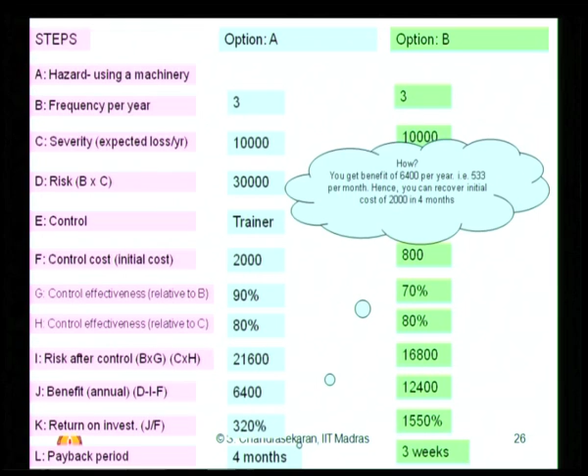So, ladies and gentlemen, we saw two examples. Ultimately, both examples were focusing on how to actually finance risk. The goal is, even if you invest in risk reduction, what would be your commitment towards finance, what would be the return, what would be the benefit annually you get from that risk reduction process, and what would be the payback period of your investment.

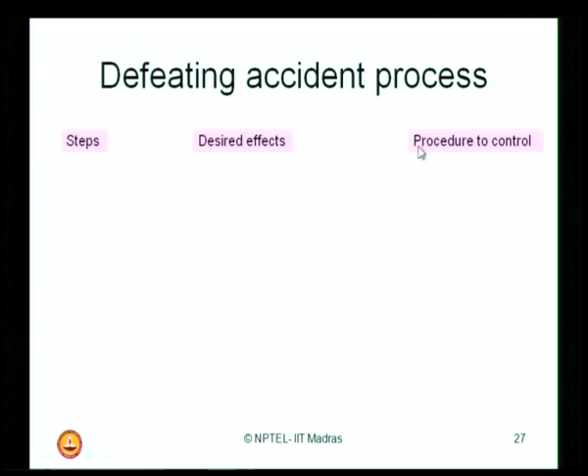Now, we are interested in looking at a very simple phenomena called how will you defeat an accident process. What are the steps involved in defeating an accident process, what are the desired effects, and what would be the procedure to control them. The steps involved are the following.

Initiation, propagation, termination. The event that starts the accident is what we call an initiating event. Events that expand the accident are propagation, and events that stop the accident are called termination. The desired effect on events that start the accident should be diminishing, and the procedure to control them may be grounding, inerting, maintenance procedure, process design, training to reduce human error.

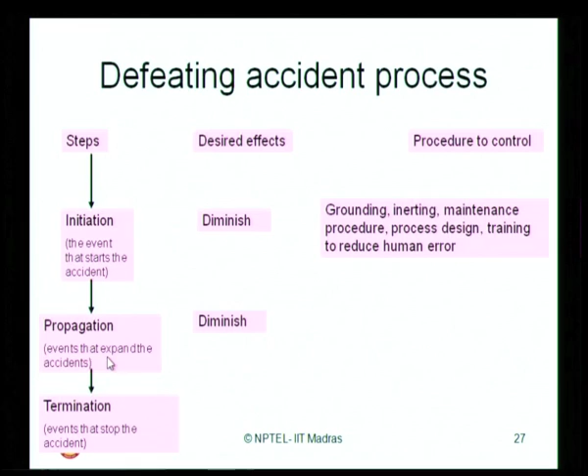When you look at propagation, you do not want those events to expand to result in accidents. Therefore, the desired effect I want on propagating events should be diminishing. The procedures to control them are emergency material transfer, less inventory of chemicals stored in the working place, use of non-flammable construction materials, installation of check and emergency shutdown valves, etc.

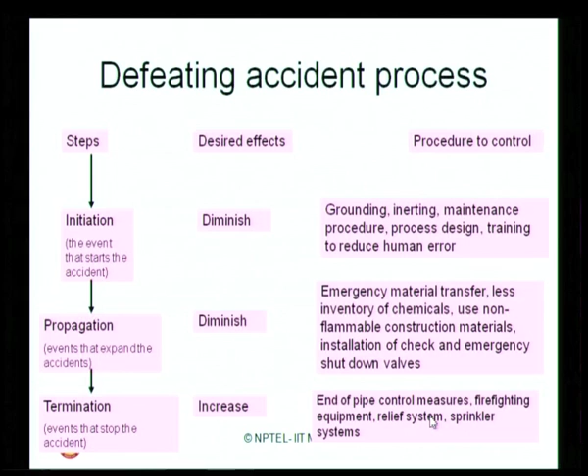And the events that stop the accident should be on the increasing side, that is the desired effect I want, and the procedure to control them would be end-of-pipe control measures, effective firefighting equipment, effective relief systems on board, and effective sprinkler systems on board.

After understanding how you would finance risk and the different methods, the fundamental question in your mind may be: is there anything like acceptable risk? In an offshore industry, can I accept a risk? Because risk is contemporary to safety, whenever I say I accept a risk, my safety is at question.

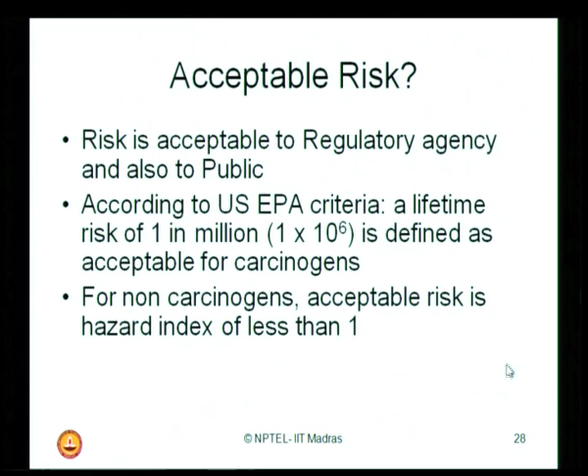Ladies and gentlemen, it is very interesting to know that risk is acceptable to regulatory agencies and also to the public. According to United States EPA criteria, a lifetime risk of 1 in a million, that is 1 in 10 power 6, is defined as an acceptable limit for carcinogens. For non-carcinogens, acceptable risk is a hazard index of less than 1.

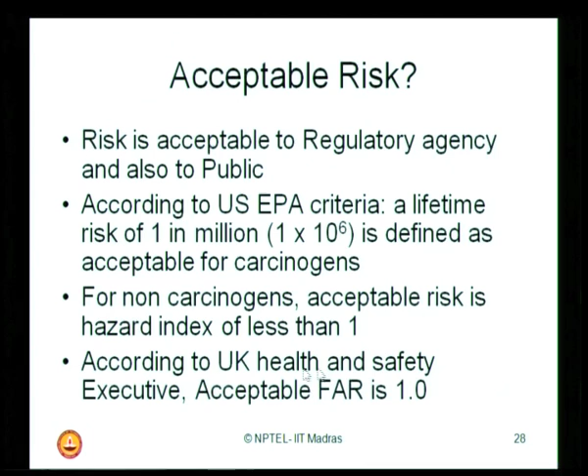According to UK Health and Safety Executive, acceptable fatal accident rate is 1.0. So, all international bodies basically specify an acceptable value of risk.

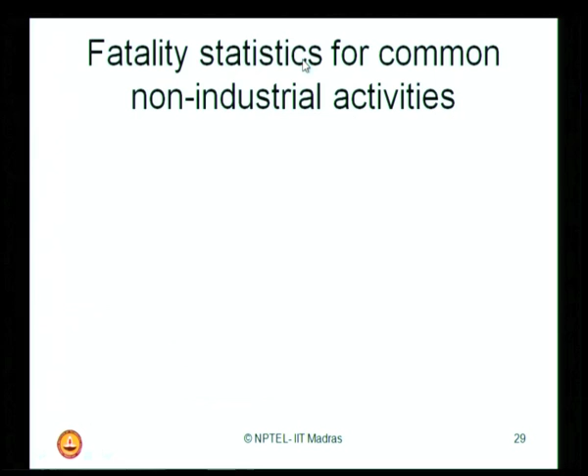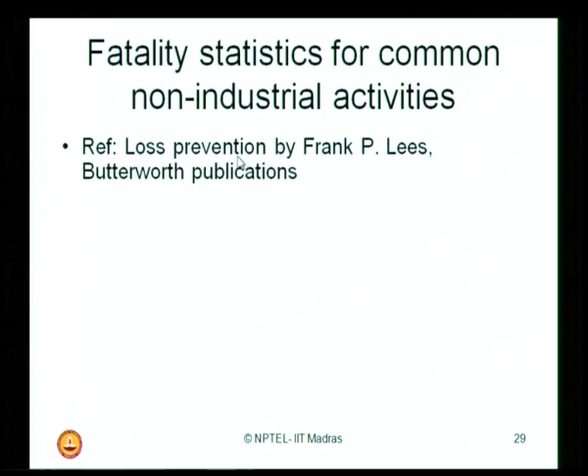Look at the fatality statistics for common non-industrial activities. Before understanding what such statistics would be for the oil and petroleum industry, let us have a very common example of non-industrial activities. This is suggested by Loss Prevention, given by Frank P. Lees, a Butterworth publication reference.

It is a simple table given by Frank saying that interestingly, even staying at home can have an FAR of 3 deaths at 10 power 8 hours. Traveling by car can create an FAR of 57, and rock climbing can be as high as 4000. These are all non-industrial activities, so you will not see any of these numbers related to offshore and petroleum industry.

We will talk about that in the coming slides. What I want to convey from this slide is that there is an acceptable level of risk even when you stay at home, that is what Lees has suggested.

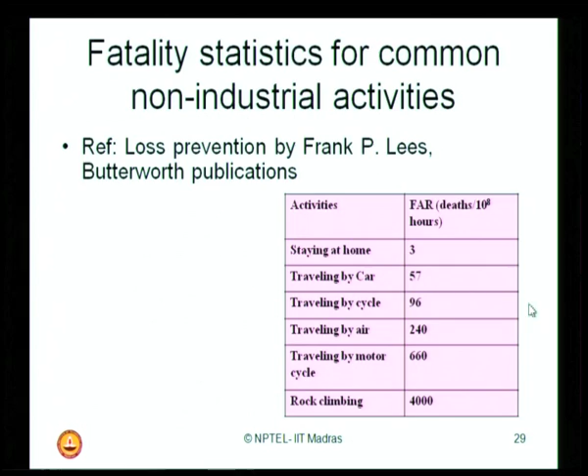I would like to just give you a tutorial sheet. Interestingly, can you try to solve these questions which I am posting to you? Remember, the solution of this tutorial sheet is not presented in this presentation; you have to write your feedback and request the solution from NPTEL at IIT Madras.

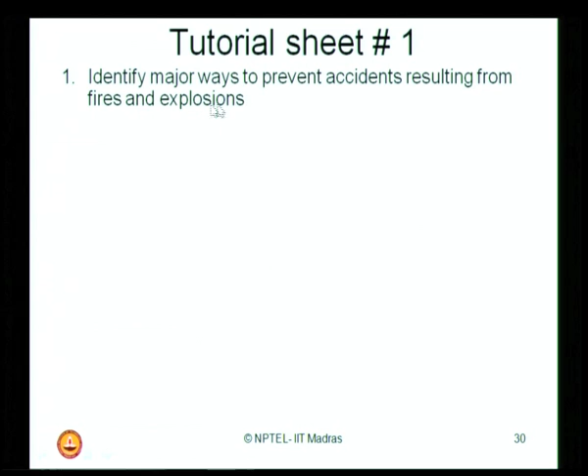Identify major ways to prevent accidents resulting from fire and explosion. There are 3 common systems used as a measure of accidents. Can you name them? Also indicate the most important common feature between the 3 methods.

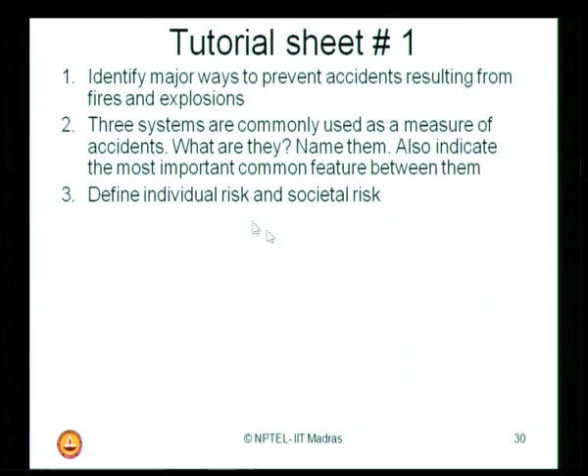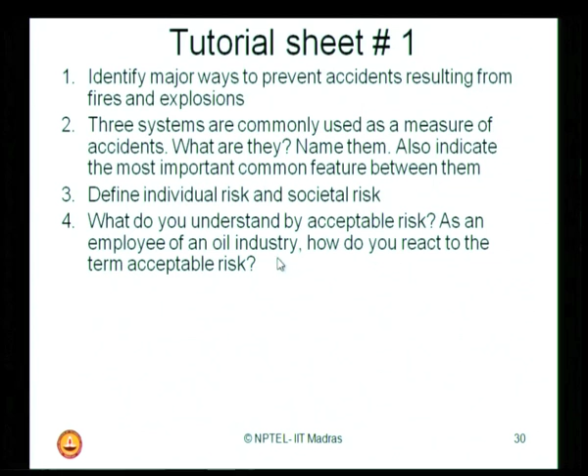Can you define individual risk and societal risk? What do you understand by acceptable risk? As an employee of an oil industry, how do you react to the term acceptable risk? We have some numerical questions also for you.

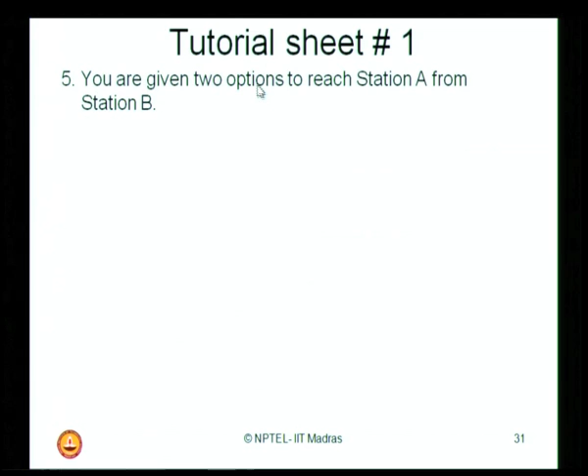You are given 2 options to reach station A from station B. You wish to drive the complete distance of 2200 kilometers between A and B at an average speed of 45 km per hour to reach the station by road. Alternatively, you plan to fly and reach station A by commercial airlines, which will just take 2.5 hours.

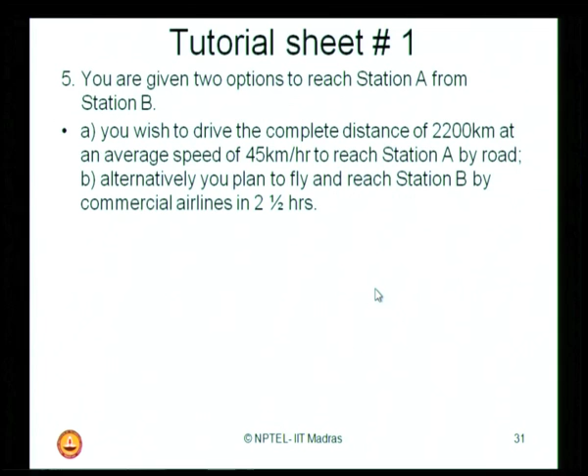Now the questions are the following: which travel is the safest? A, traveling by road at a specific speed, B, traveling by airlines at a specific time. Amongst these 2, if you have got to travel, which travel is the safest? Remember, you have got to identify your answer based on fatality accident rate in general.

Table 3 for different fatality accident rates for different modes of transport is available in the presentation; I will just show you. You have got to also find what is the fatality rate for the safest trip amongst these 2.

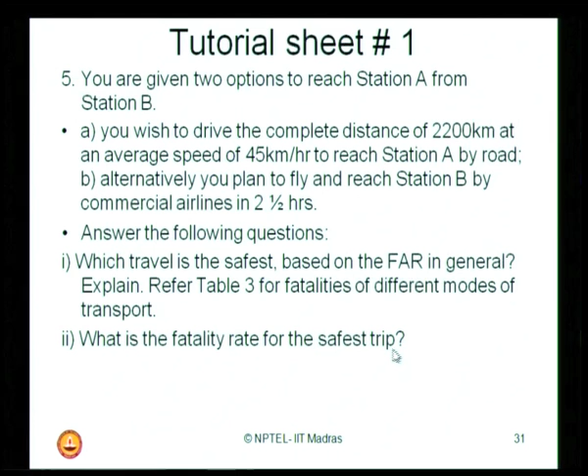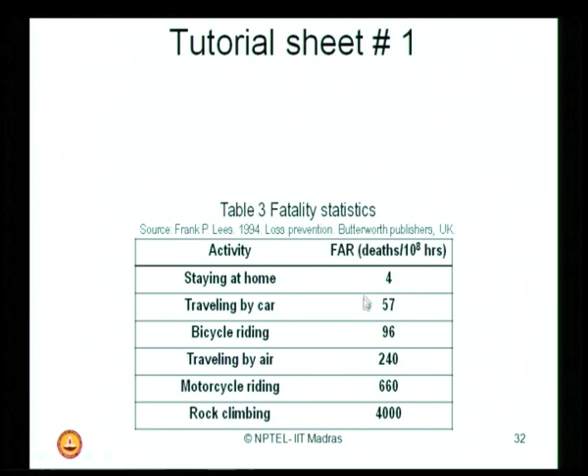Now the fatality statistics given for different travel by Frank Lees are the following. Traveling by air has a fatality rate of 240, whereas traveling by car has a rate of only 57. Remember, traveling by cycle also has a fatality accident rate.

Suppose you travel by car at an average speed of 60 km an hour, do you think the FAR will change? The earlier example said you have to travel at 45 km an hour. Do you think by increasing the speed of the car the fatality accident rate will change? If you feel it is changing, will it increase or decrease? Guess the answer, do not try to work it out again. You should also justify your answer without working out the FAR in detail.

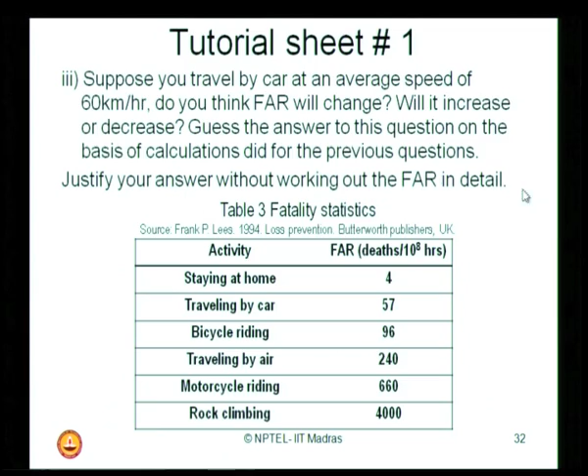I have another question for you. Question number 6: an employee works in a process industry with an FAR of 4.0. This industry has normal working hours. As the employee gained experience in this trade, he wishes to change his job. Another oil and gas company abroad offered him a job. The work agreement states that his working hours are only 4 hours per shift and he shall have to work only 200 days in a year. This is a part of the work agreement shown to the employee by the company in advance.

Now the process industry and the oil and gas industry have different FARs. For the process industry the FAR is 4; for the oil and gas industry I have a table given to you. With reference to that table, you have got to suggest the following. Now the employee is confused, because the FAR ratio for oil and gas industry is much more than the process industry. The employee is confused because he foresees a higher risk in the oil and gas industry compared to his current process industry job, but he expects a financial gain by shifting.

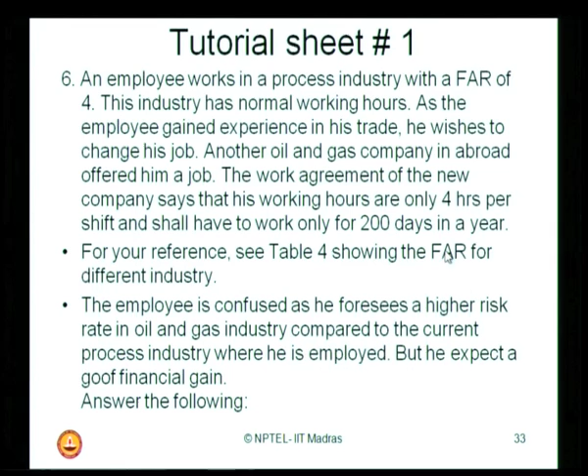Let us try to read the problem again and understand. An employee works in a process industry where the FAR is 4. He wants to shift his job from this industry to an oil and gas company. The FAR for the oil and gas company is much more than 4. I have a table which will show you what the FAR for the oil and gas company is. But the working hours of this company are scheduled in the agreement: he has to work only 4 hours per shift and only 200 days in a year. The employee is confused because the FAR number given for the oil and gas company is much more, so he foresees a higher risk.

Now the employee opts for a change in his job. Should he change the job? You must advise him as an HSE consultant. Explain the basis on which you will work out his safety in the new job.

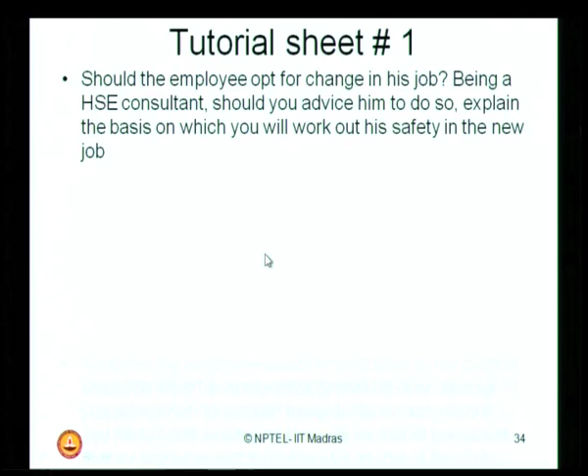Suppose the employee wants to shift back to his original employer after his abroad assignment is over. Can you advise him to bargain on his working hours so that he faces the same fatality rate as that of his recent abroad assignment? If so, state briefly those lines of advice that you will sketch for him.

Now this part is very interesting. The employee changes from an FAR of 4 to an oil and gas industry job. As an HSE consultant, you advise him accordingly, but suddenly, after working for some years in the oil and gas industry, the employee wants to get back to the previous job. Now you have got to advise him again, on what bargain he should do. He can now bargain because he is more experienced.

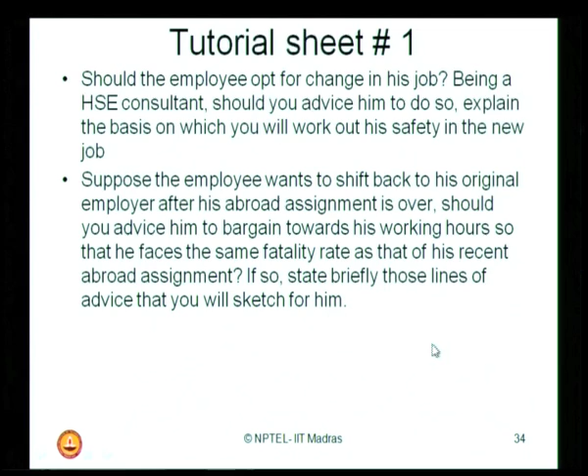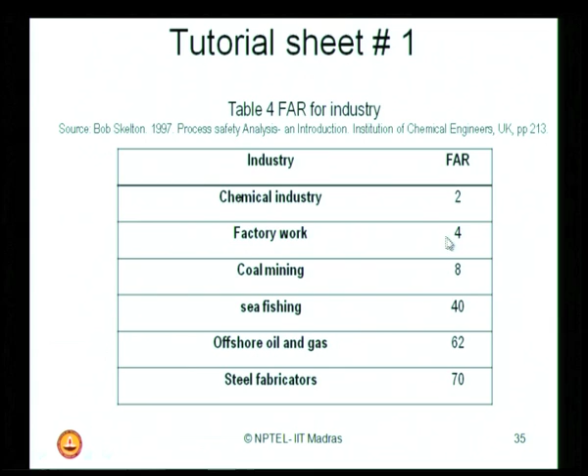Let us look further beyond. I am interested in doing what I call risk assessment. It has got two categories: risk determination and risk evaluation. What do you mean by risk determination?

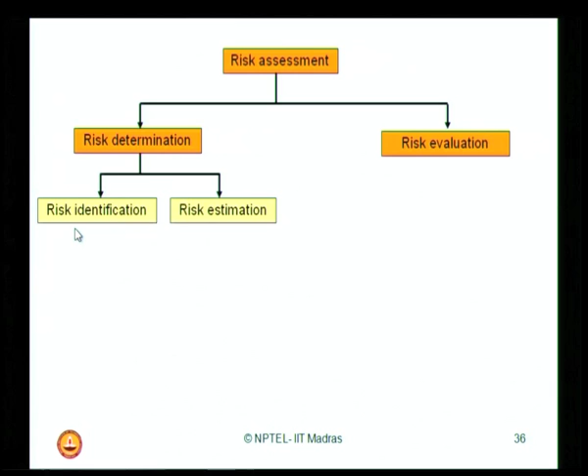It has got again two branches: first, identify the risk, and then estimate it. Both of them are called risk determination. In identification, I will observe for new risks or for changes in risk parameters already existing. In estimation, I will determine the probability of occurrence of risk and the magnitude of consequences if the risk occurs.

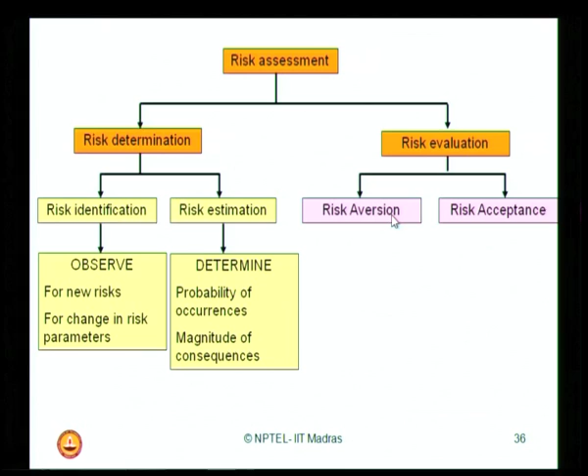Whereas in risk evaluation, I will look for risk aversion or risk acceptance. In risk aversion, I will determine the degree of risk reduction and the degree of risk avoidance, whereas in risk acceptance, I will establish risk references and risk referents.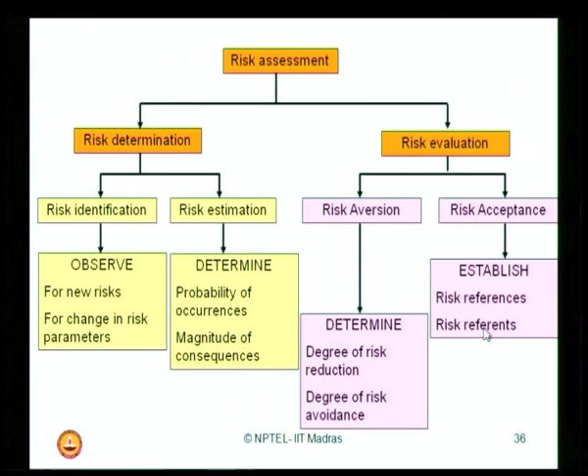Let us take a specific case for risk assessment.

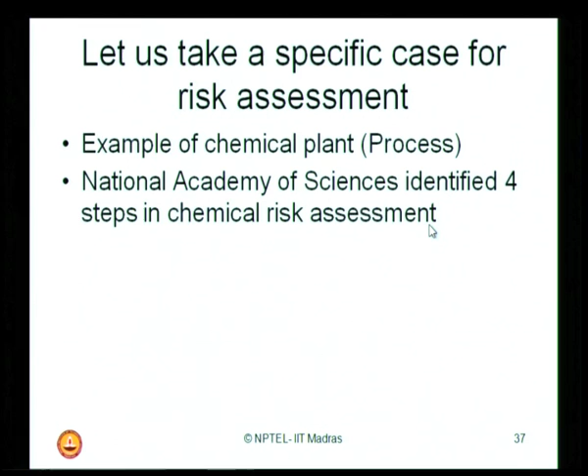We will consider now a chemical plant which I call a process industry. The National Academy of Sciences identified 4 steps in chemical risk assessment. I have a separate module where I will explain in detail how to do a chemical risk assessment. In summary, the National Academy has identified 4 steps: hazard identification, dose response assessment, exposure assessment and risk characterization.

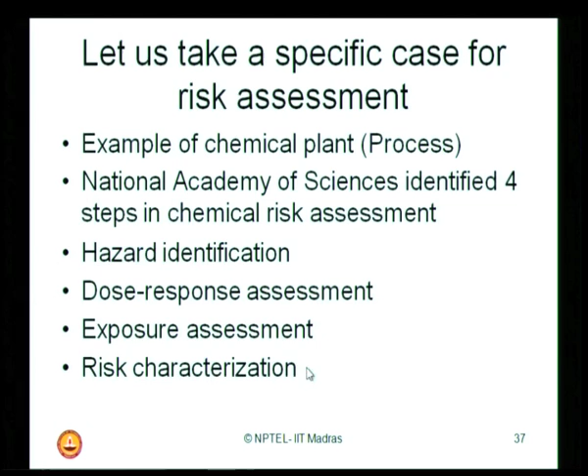What do you understand by hazard identification? This includes engineering fault assessment. Basically, it is used to evaluate reliability of specific segments of a plant in operation. It determines probabilistic results, and the method employed is what we call fault tree analysis.

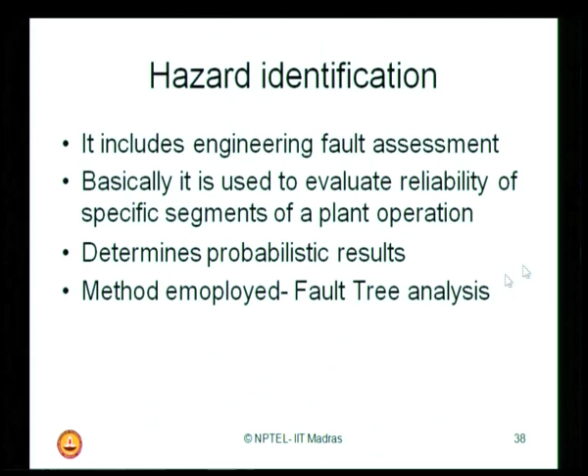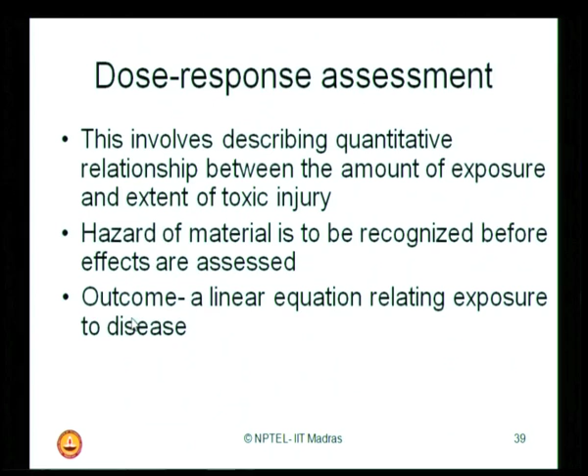The dose response assessment involves describing the quantitative relationship between the amount of exposure and extent of toxic injury. Hazard of material is to be recognized before effects are assessed. The outcome will be a linear equation relating exposure to disease, and the method used is regression analysis of dose response data.

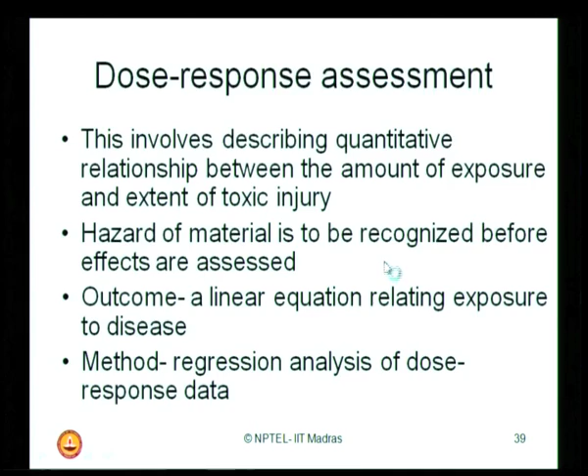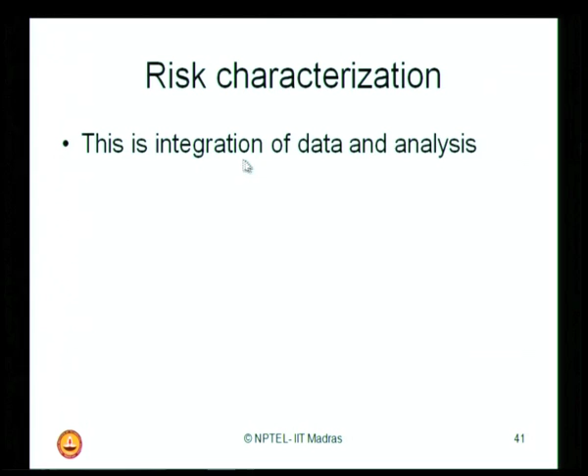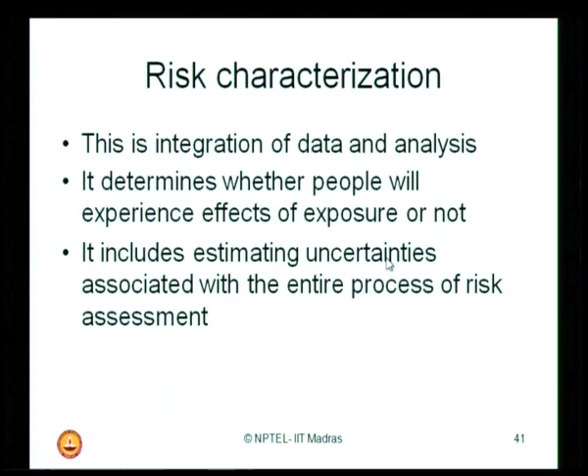The exposure assessment describes the nature and size of population exposed to the dose agent, its magnitude and duration of exposure. This assessment shall include analysis of toxicants in air, water or food. Finally, risk characterization is an integration of data and analysis. This determines whether people will experience effects of exposure or not. It includes estimating uncertainties associated with the entire process of risk assessment.

Now let us look at some application issues of risk assessment. Risk assessment often relies on inadequate scientific information or lack of data. That is a very serious note. You do not have sufficient scientific information to assess risk, especially in the oil and gas industry.

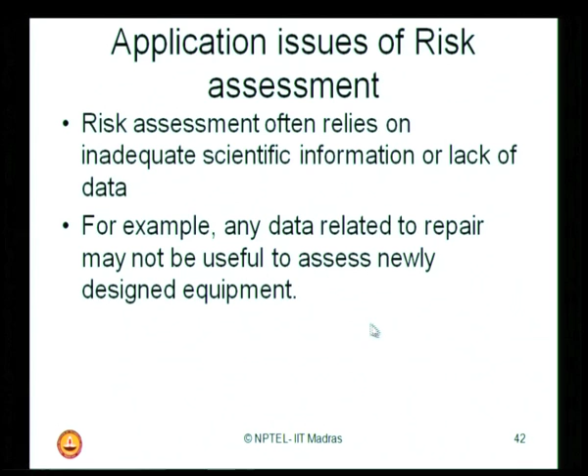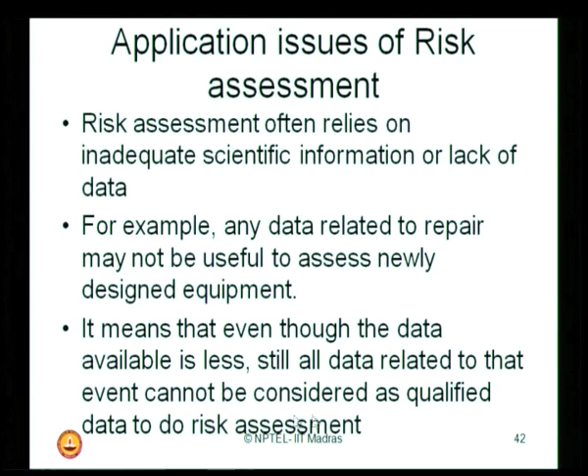For example, any data related to repair may not be useful to assess newly designed equipment. Already we have a shortage of data, and even within the data, those related to repair cannot be used for design. It means that even though the data available is less, still all data related to that cannot be considered qualified data to do risk assessment. Then what do we do? Suppose, for example, we have an enormous amount of irrelevant data, then what do we do?

I can give you a specific example. In toxicological risk assessment, generally the data related to tests on animals is considered to predict their effect on human beings. Now one can say the effect of toxicants on animals can be different from that on human beings, so one can also say it is irrelevant data. Then how do we do risk assessment? It is a good question.

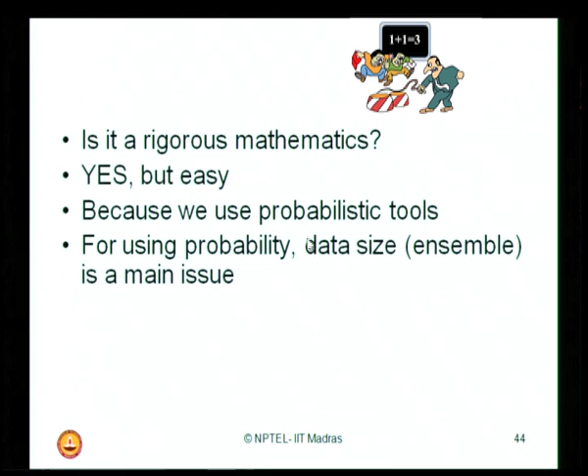Do you think that risk assessment is going to be rigorous mathematics? The answer is yes, but it is very simple and easy because we use probabilistic tools to do that. For using probability, obviously the data size, what we call the ensemble, is the main issue, but people still do a conservative approach to avoid underestimating risk. Others may use comparative techniques with several options, which will be discussed in different modules in the coming lectures.

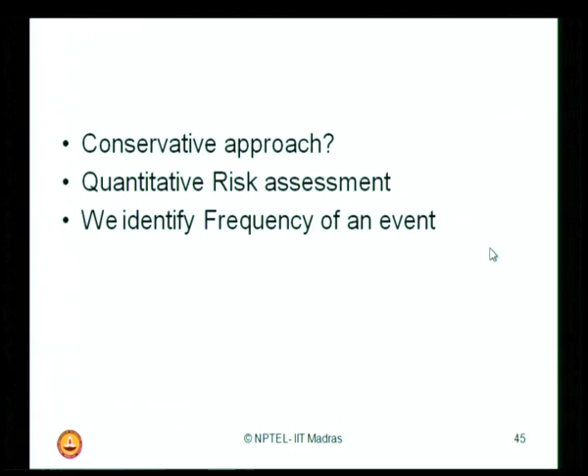Why is the approach called a conservative approach? Then what is quantitative risk assessment? In quantitative risk assessment, we identify the frequency of an event, its severity, then calculate risk rankings, assign them, and plan to reduce risk. This is what we address as risk management. We saw an example of A, B, C, D sections of a plant given by Morgan analysis.

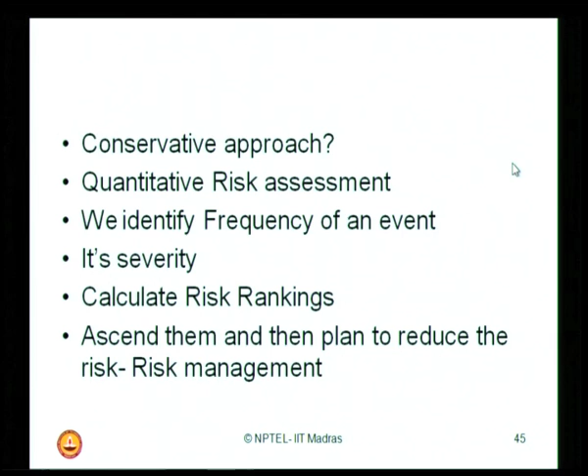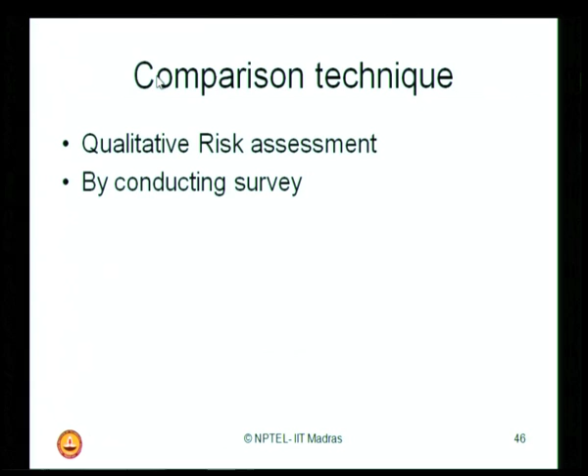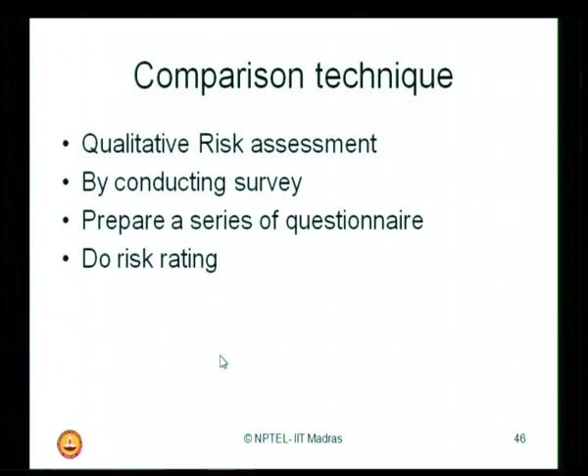We can also use what is called a comparison technique. This is what we call qualitative risk assessment, done by conducting a survey. You prepare a series of questionnaires, then do risk rating, trying to understand plant A's risk compared to plant B. Form a series of questions and see whether plant A is relatively safe compared to B. That is what we call qualitative risk assessment.

Now William Fine has given a very good approach for doing this. The reference is given in Journal of Safety Research, 1971. This method is applicable if cost to correct hazard is justified. Remember that in the oil and petroleum industry, if you are not able to justify the investment towards risk reduction or hazard mitigation, then no industry will approve your methods of risk reduction at all.

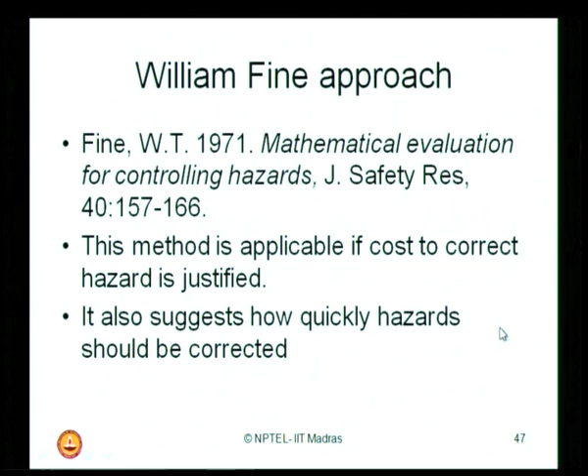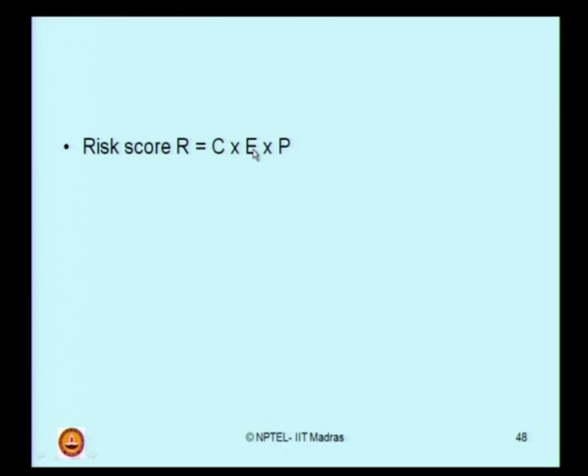William Fine has given a very interesting method to estimate the justification of such investments. This also suggests how quickly hazards should be corrected. This method involves use of risk assessment. Now let us see how to estimate risk score R. The risk score R is actually a product of C, E and P: C is the consequence rating, E is the exposure value, and P is the probability value. Now the risk score can be used to decide how quickly to act to correct the hazards.

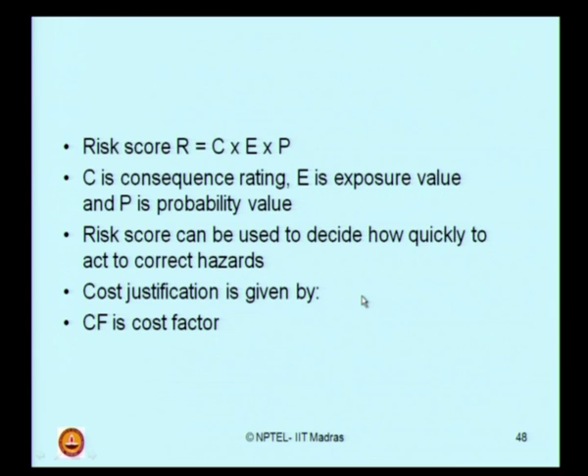The cost justification is then given by a simple equation: R divided by Cf into Dc. R is the risk score which I have already estimated, Cf is the cost factor, and Dc is the degree of correction value.

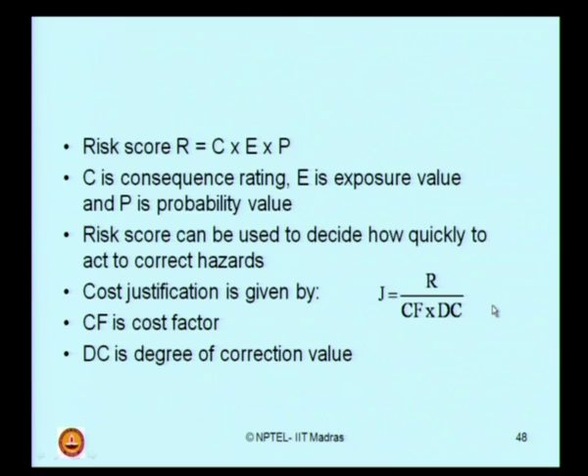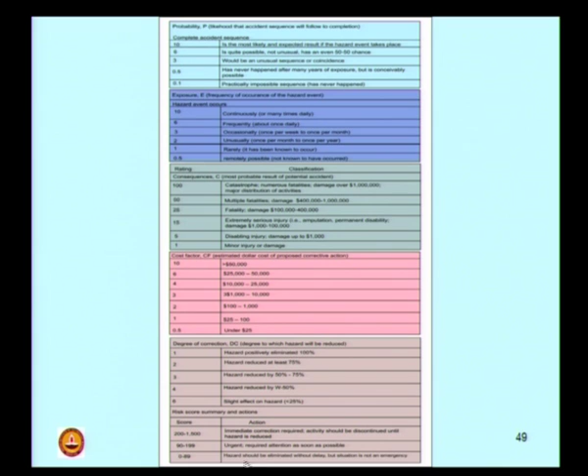If the risk score obtained is between 200 and 1500, then you must recommend immediate corrective action so that the activity should be completely discontinued until the hazard is reduced. If the risk score lies between 90 and 199, required attention should be given as soon as possible. If the risk score comes between 0 and 89, the hazard should be eliminated without delay, but the situation is not very emergency.

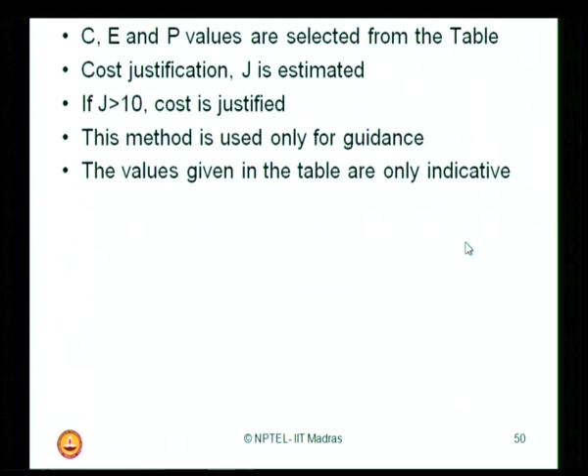So C, E, and P values are selected from the table just shown to you. Cost justification is then estimated from a simple equation given to you. If the justification comes to more than 10, then the cost involvement is justified. This method is used only for guidance. The values given in the table are only indicative. You can also prepare a table of your own choice, perhaps by conducting a periodic survey. Interestingly, the method provides a simple way to evaluate a variety of hazards to present to management.

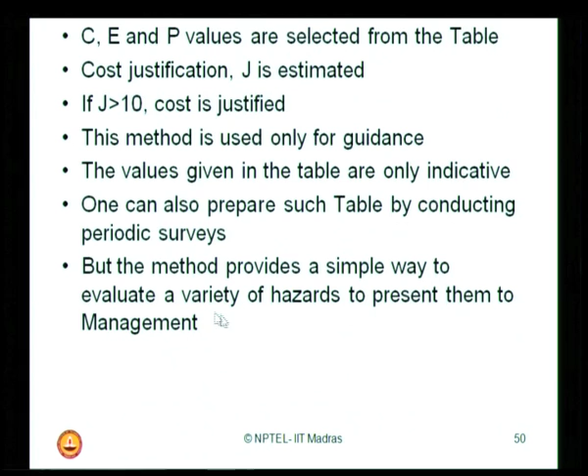I will take an example of an offshore drilling rig accident. The consequence of such accidents is 100, because when such accidents occur it becomes catastrophic, therefore C is 100. The exposure is 1 because this kind of event occurs rarely. The probability of this accident is 10 - remember, this is not the probability of occurrence of the event, but the probability that the accident, if it occurs, will follow to completion. Generally all oil rig accidents follow to completion, therefore I have given this P number as 10.

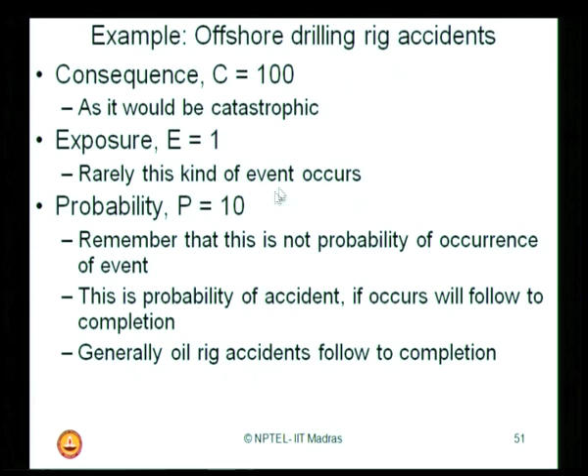Now, ladies and gentlemen, you can easily estimate the product of these three, which I call the risk score, which comes to 1000 for this problem. Now let us work out cost justification.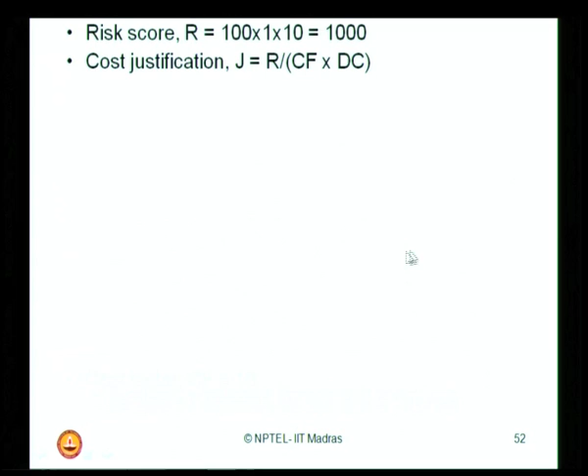This is simply given by the equation R divided by Cf into Dc. I look for the cost factor from the table again. I put a value of 10 here, because the estimated damage level, if at all such a rig accident occurs, is very high.

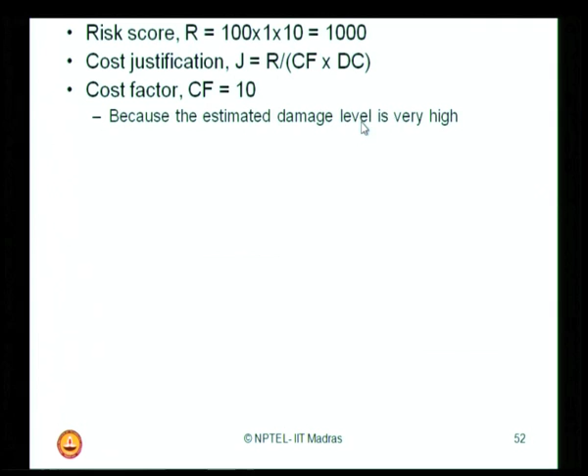I also look at the degree of correction and put the Dc value as 6. You may wonder why I am giving this very high value - it's because the corrective measures taken will have only a very slight effect on such hazards, since oil rig accidents are really accidents in a strict sense. Whatever corrective measures you take, accidents still occur; the corrective measures have very little effect on controlling hazard mitigation. Therefore, I use 6 as my Dc.

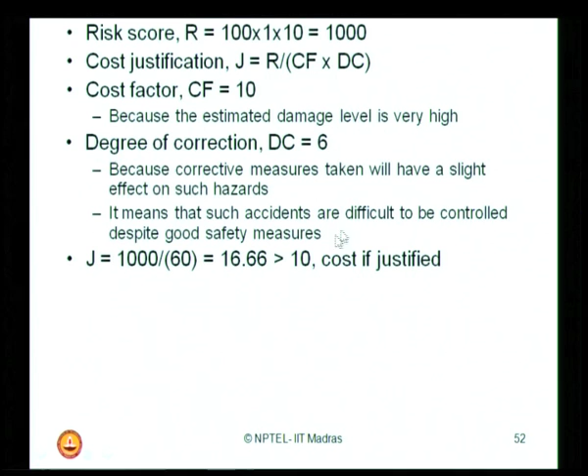Now I can easily work out the cost justification, which comes to 1000 divided by 60 - the product of Cf and Dc - giving 16.66. Therefore, since any mitigation methods suggested to reduce such accidents give a value more than 10, the cost involved is justified.

Look at the risk score R, which is 1000. This falls between a value of 250 and 1500, meaning immediate correction of such accidents is required. This is very alarming, because detailed risk analysis is mandated for such cases. All offshore industries conduct third-party HSE audits once every year.

So, ladies and gentlemen, we have had a very explicit presentation on how to assess risk using different techniques, and we have solved three examples for you. I have left one tutorial sheet for you, which has some objective questions, subjective questions in theory, and some example problems to be solved.